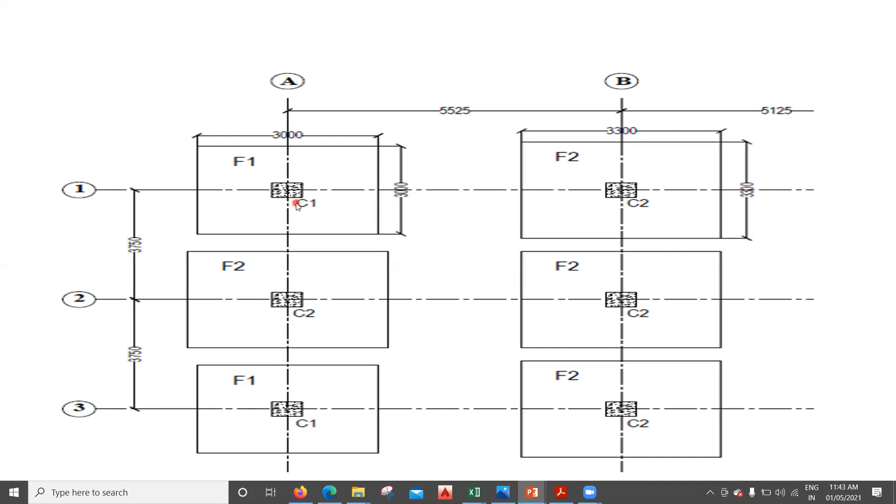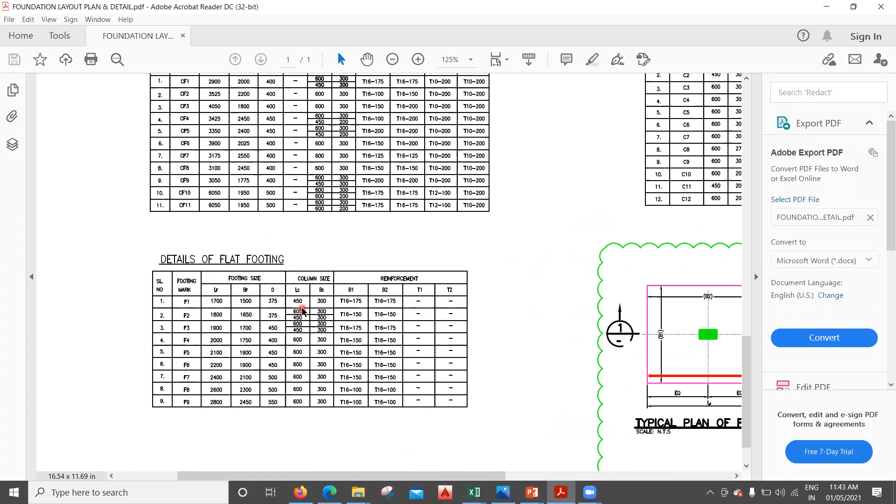Similarly, I'll show you here as well. So this is a drawing. Along with that, you can see the details given here. They're going to give the details. What is your footing name? What is the size of your footing? What is the length? What is the breadth? What is the depth? What column is coming on that? What is the reinforcement? Those things they are going to give in the drawing.

So here also I've taken the same thing. We have two footings, F1 and F2. The length of F1 footing is 3 meter, that is 3000 mm, by breadth is also 3000 mm, and the depth of the footing is 650 mm. Similarly, F2 footing is 3300 by 3300, and the depth is 750 mm.

And these are the reinforcement that you need to provide in the footing. Since these are RCC structures, in F1 footing you have to provide 12 diameter at 150 center to center spacing, and in the B direction, you have to provide 12 diameter at 150 center to center spacing. And here also you have to do the same thing, right?

If you're not able to understand how this has to be done, I have explained all these things in one of my courses on learn construction methodology. If you know it, well and good; anyhow I'll try to add one section here on how to understand the structural drawings. So as of now we'll concentrate on this part, right?

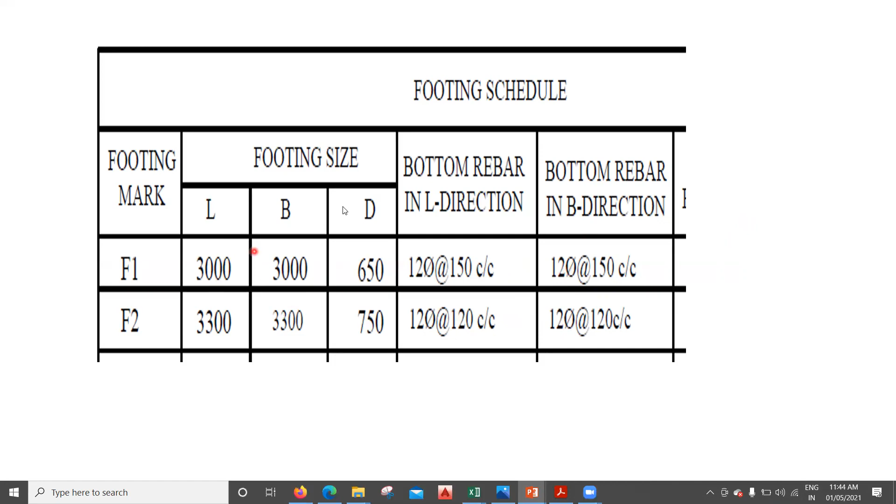So this much is understood to us. Now we'll try to prepare that sheet. I'll take you to that sheet now. So I've written everything here. You have to prepare an Excel sheet something like this. I'll be putting the same thing, you can try to prepare it. So coming to this item description, I've written unit, the number of members, length, width and depth, the quantity, and then the total quantity.

So what all footings we have? First we'll start with earthwork. Earthwork in the sense how much excavation has to be done if you want to do the concreting of this. So we have F1 and F2 footing, and then we have to do the PCC work, again F1 F2 footing, RCC work, shuttering work and reinforcement, right? So unit is in cubic meter.

Now coming to the number of members, how many F1 footings do we have? I'll take you to the drawing again. So if I take here F1 footing, we have one here. This is the second one, right? We have two F1 footings. So in the measurement sheet, I'll write number of members is 2 here.

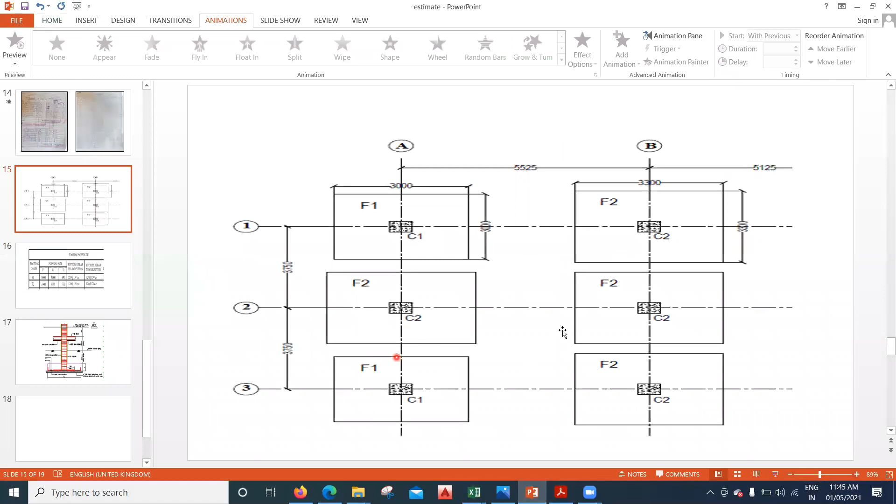Similarly, how many F2 footings are there now? 1, 2, 3, 4 F2 footings are there. So I'll input 4 here in F2 footing, right? This is also done. Now coming to the length. Now what we're trying to find is the excavation.

One thing we need to understand, whenever we do the excavation, this is how the excavation is done. So we are trying to find how much quantity of soil we are going to take out. Let us say my footing size is only this much. I'll draw it here. This is my footing size. But when we do the excavation, we have to take some extra offset to that. So that is called working space.

So whatever is the footing size, on both the sides you have to take some extra distance. I'll tell you how it has to be taken. So in this way, we have to take it. So what is this exactly? The first extra distance from here to here, this is a PCC offset. I'll write it here.

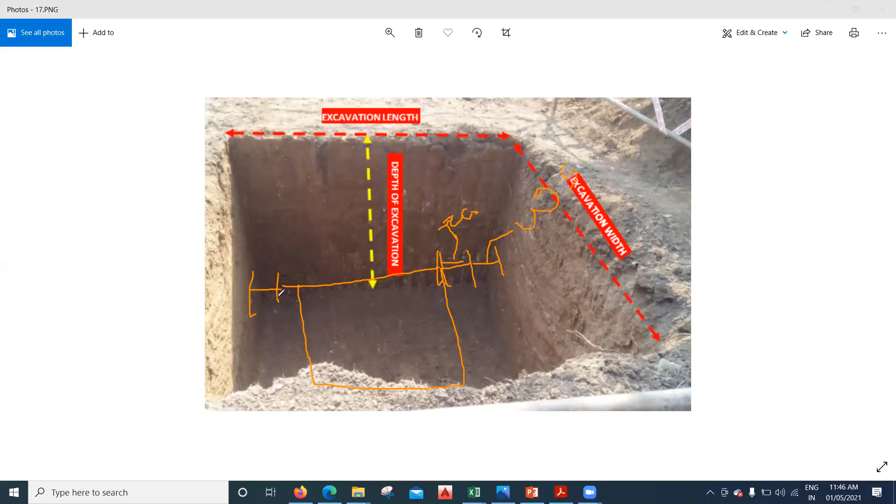This is a PCC offset. And next, this distance from here to here is a working space. I'll write working space as WS. Similarly, from here to here is a PCC offset, and from here to here, this extra will be your working space. Okay, so what is this working space?

If you don't give a working space, when the laborers get into this pit to do the shuttering work, they will not have enough space to work easily. So keeping that in mind, we do the excavation a bit more, so that it will be easy for the laborers to do the work here and also to keep the shuttering here, right?

And this working space, usually we can take it as 300 from both sides. Here also it is 300 and here also it is 300. I only explained along the length. On this side also you have to do the same thing, okay? You have to take the PCC offset and working space on all sides, along the length and along the breadth. Yeah, 300 is the working space we try to take.

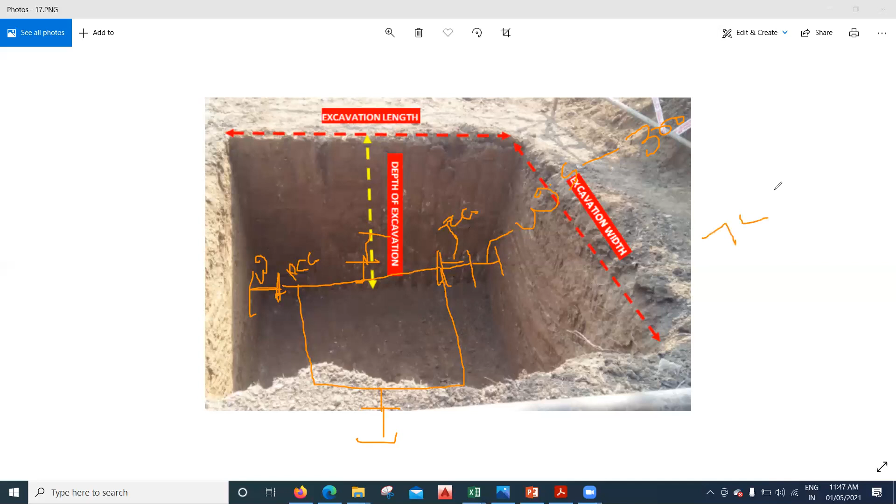So it will be equal to sign, 3 plus 0.3 for the left side offset plus 0.3 for the right side offset, plus the PCC offset of 75, so 0.075 on both sides, plus 0.075 plus 0.075. I'll hit the enter button. So this will be my length. Along the width also it is again 3 meter plus 0.3 plus 0.3 plus 0.075 plus 0.075, and hit enter. You have to use the equal to sign, only then Excel will work it out.

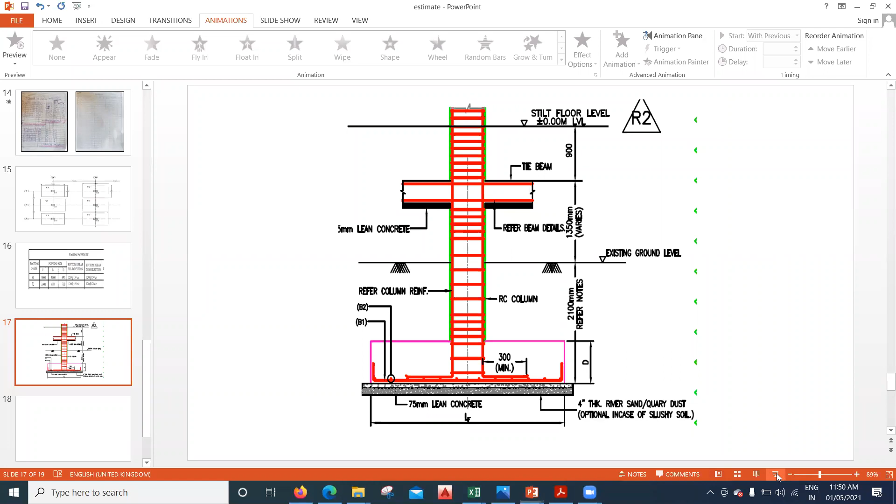Now coming to the depth. This is not the depth of footing, this is the depth of excavation. For the depth of excavation, look into this drawing. This is my existing ground level. From here I have to do the excavation of my footing. So what is this length? They have given 2100 from here to the top of this PCC, but we have to do the excavation till the bottom, right?

So it is 2.1 plus the PCC thickness of 75, plus there is something written: 4-inch thick river sand. So my total excavation will be 2.1 plus 0.075 for the PCC, plus the 4-inch sand bed, which comes out to 0.1, that is 100. If I add everything, I reach this bottom, and this is my excavation. 2.1 plus 0.075 plus 0.1 gives 2.275.

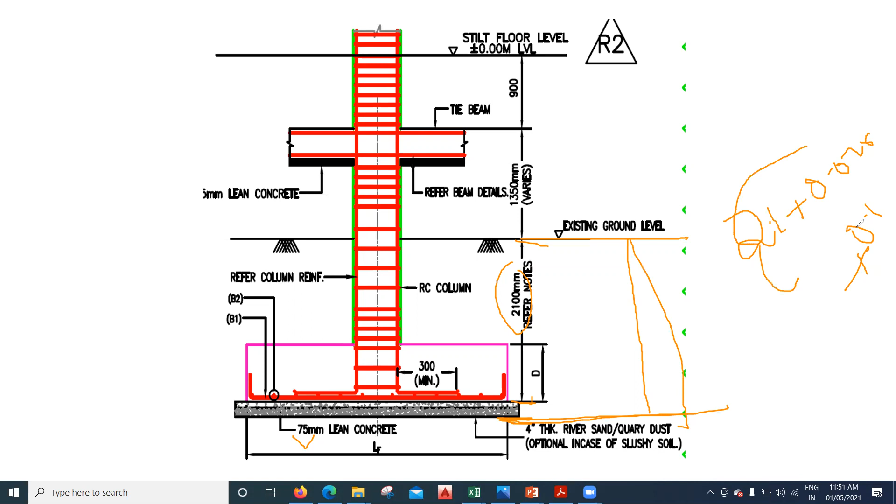So this is my excavation, right? That means this much excavation I need to do. The depth of excavation will be 2.275.

You can see everywhere the excavation has been done. So same thing I'll input here. So you can see 2.275, 2.275. Now coming to the quantity, it will be very simple: length, multiply that by width, multiply by depth, we'll get the quantity. Similarly, do this for here as well. Length and width is 4.05, depth is 2.275; length, width and depth, you'll get this.

Now coming to the total quantity, whatever calculation I've done in the quantity, that is for the single footing. When it comes to the total quantity, how many F1 footings I have? 2 I have, right? So 31.99 into 2 comes out to be 63. You have to click here. What you have to do is put the equal to sign, take this quantity, multiply this by the number. That's it.

Now coming to this also, it's the same thing. 37.31 is for a single F2 footing. How many F2 footings we have? We have 4 such footings. So multiply 37.315 into 4. Same thing I've done here. You'll get it. You can try to do it manually as well.

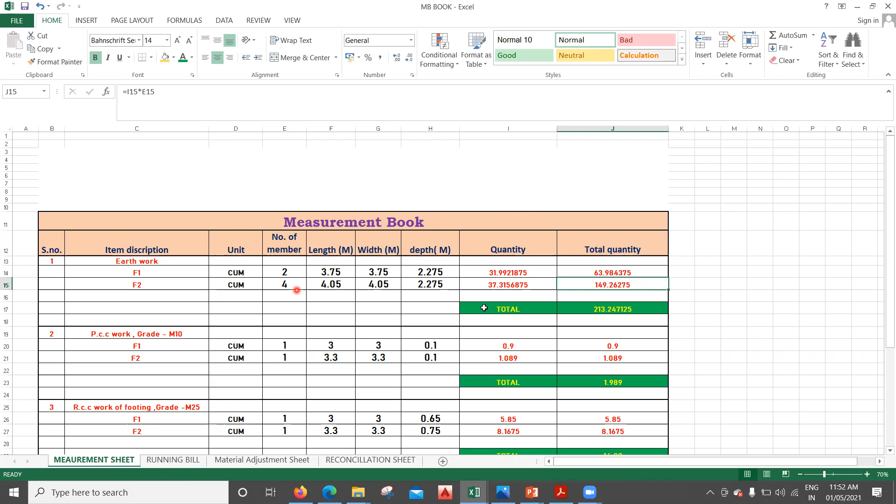Now the total excavation, how much we have done for this particular month. What I'm speaking of is only for this particular month; this much work I've carried out. So total will be 63 plus 149, which comes out to be 213 cubic meters of earthwork done in this particular month.

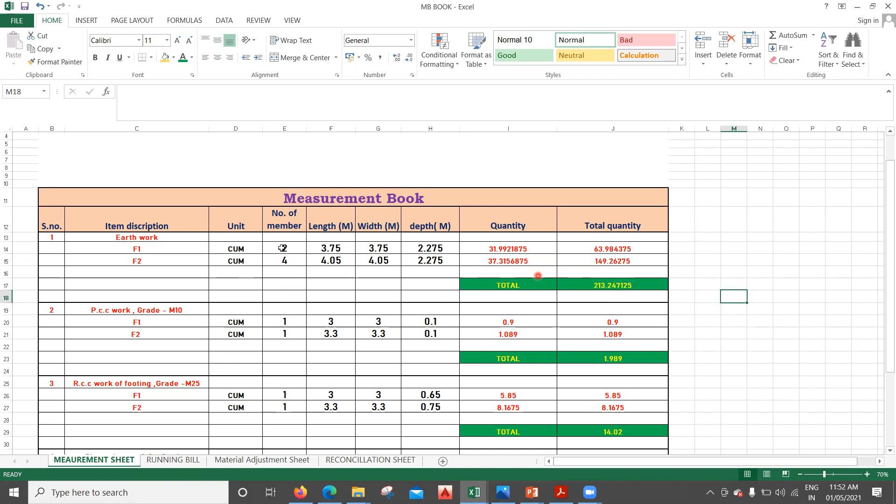Similarly, now go for PCC work. In the PCC work, again, F1 footing, how many we have? 2 footings. F2 we have 4 footings, right? So this time, what will be your length? Whatever is the size of your footing. This is my size of the footing, and for that I have to add PCC of 75 mm on the left side and 75 mm on the right side. Similarly, along the width also you have to do the same thing: 75 mm offset on this side and 75 mm offset on this side, right?

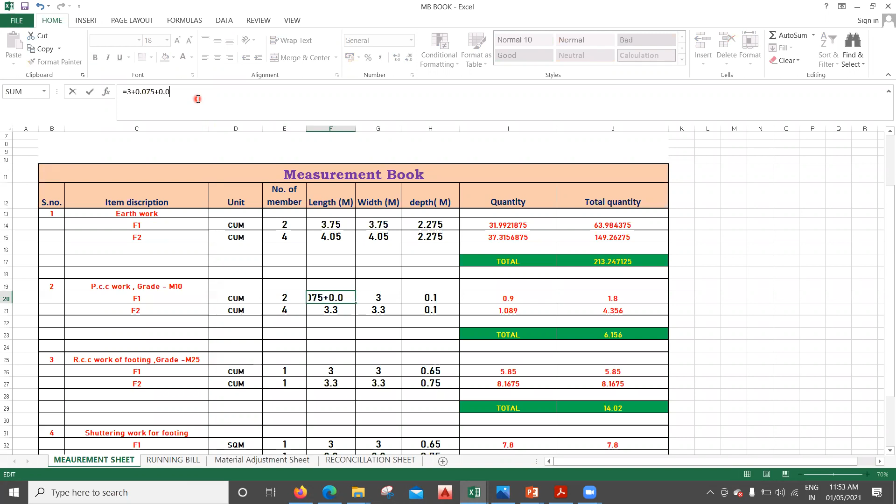So same thing I will do here. 3 meter is the size of my footing. I'll write it here: equal to 3 meter plus 0.075 plus 0.075. You can copy the same thing, or you can write 3.15 on both sides. And this is 3.3, so equal to 3.3 plus 0.075 on the left side plus 0.075 on the other side. Same thing, you can copy it here, 3.45.

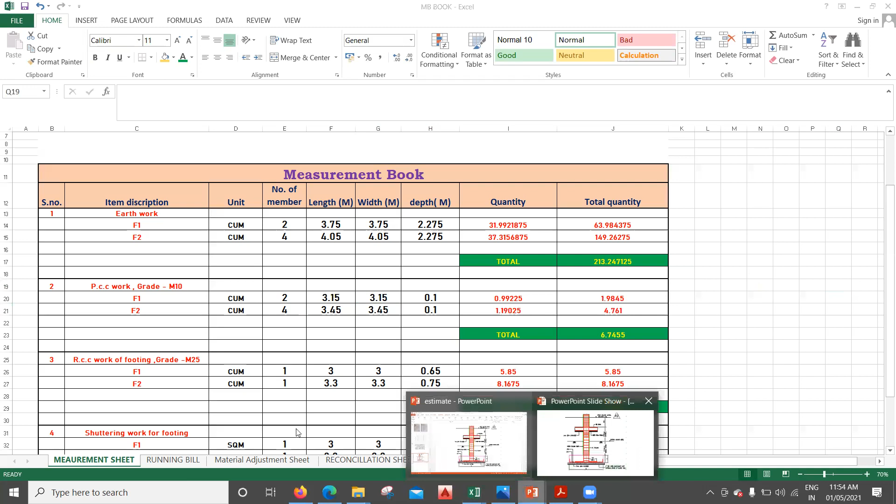Now coming to the thickness of the PCC, we'll consider the thickness of the PCC as 75 mm, because in the drawing it is mentioned. If you see here, what is the thickness given? 75 mm lean concrete. Lean concrete is also called PCC, right? So with this understanding, we'll go to the Excel sheet. 75 is in mm; I'll put it in meters, 0.075. That's it. The rest is the same as whatever explanation I have done.

Now coming to the RCC work on the footing. Here the concreting of that footing will be similar to the size of the footing. So the length is 3 meter, width is also 3 meter for F1 footing. For F2 footing, the length is 3.3, the width is 3.3. And coming to the depth, you can see in this drawing, right?

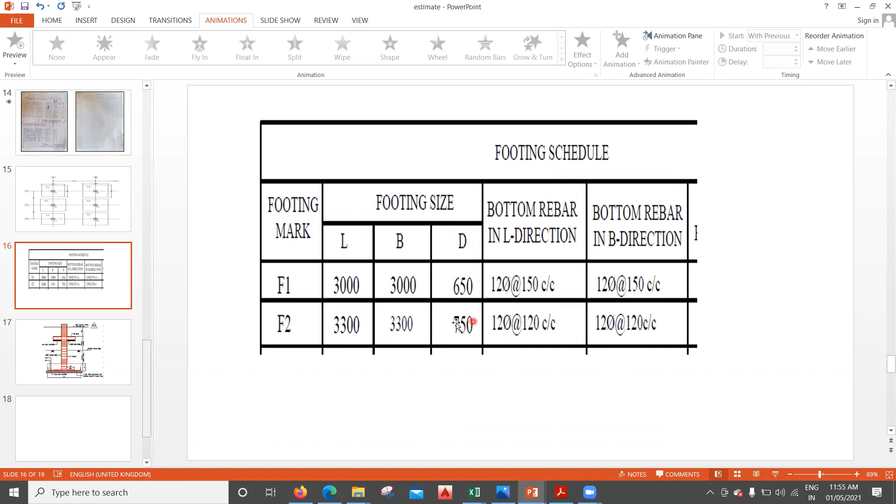See here, the depth of F1 footing is 650 mm, so 0.65. For F2 footing it is 750 mm, so 0.75. Same thing you can see here, 0.65, 0.75. Whatever is the size of the footing, that you have to write. The only thing is, the number of F1 footings is 2 and F2 footings is 4. That's it. The rest Excel will do on its own; I have given a link.

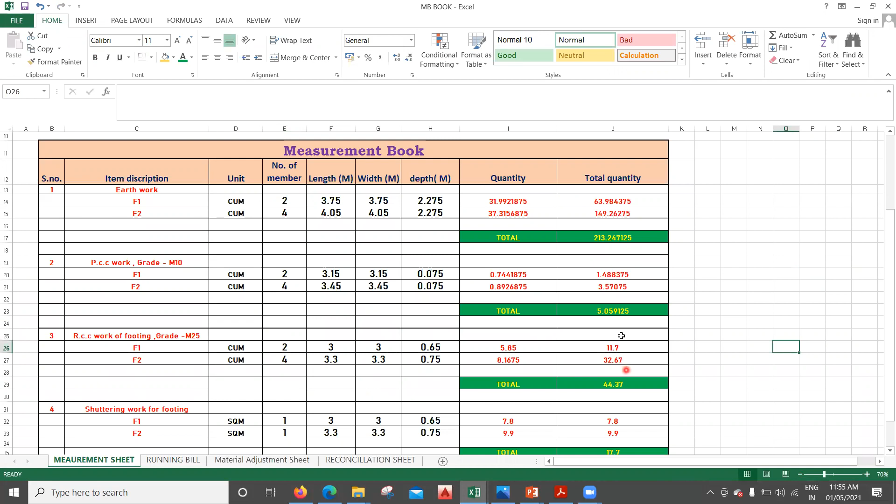And coming to the shuttering quantity. Shuttering quantity we will measure in square meters. Now, how do you find the shuttering quantity? There I have given a formula. If you want, I'll take you to one of that.

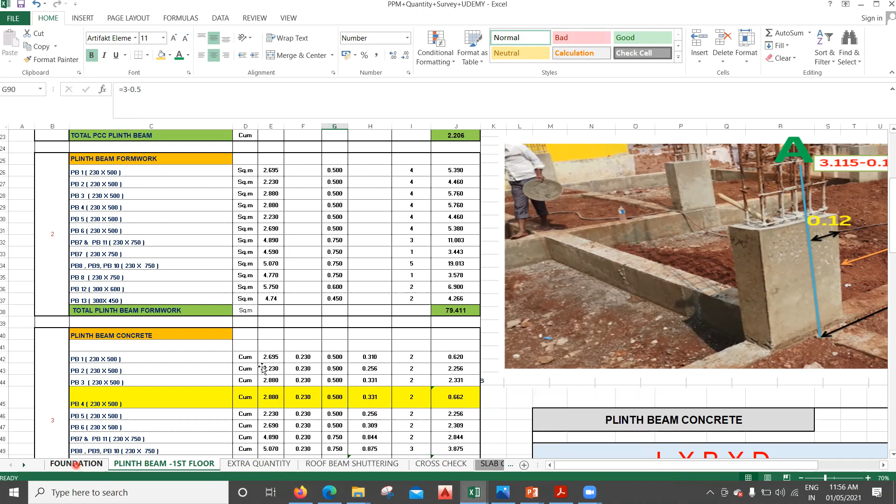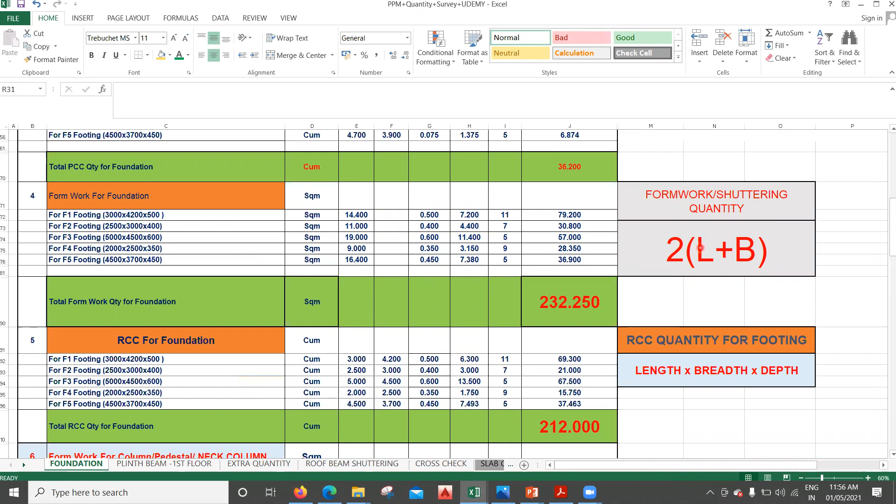Yeah, for the foundation, how to find the quantity of this thing: you can see here the formwork or the shuttering quantity. We have a formula: 2 times the length plus breadth. Whatever length you have plus breadth, you add it and multiply that by 2, you're going to get the shuttering quantity. So applying the same formula here, if I go back, see again, make these changes here.

2 footing we have, this will be 4 footing. Coming to the size 3.3, 0.75. Now here you don't have to make the change. Coming to the total quantity, here you apply that formula. So I already applied that formula. 2 into length, the length is 3 meter and the breadth is also 3 meter. You multiply that into 0.65, because see, I'll do it here.

2 times length plus breadth. Okay, I need to find the perimeter. Whenever you try to find the shuttering quantity, this is my footing size, I want to find the perimeter. So this length, this length, this length and this length I need to add. So I'll get perimeter. Perimeter you multiply by the depth of the footing, you'll get the area of the footing. Okay, so with this understanding, you do the same thing here. I'll do it anyhow.

See, 2 into length plus breadth. Length is 3 meter plus 3 meter. 3 plus 3 is 6. 6 into 2, 12. 12 into what is the depth of this? Depth is 0.65. Multiply 12 into 0.65. If I do, I'm getting 7.8. Same thing I'm getting in Excel. Similarly, I'll do it for this as well. Okay, I'll do it here.

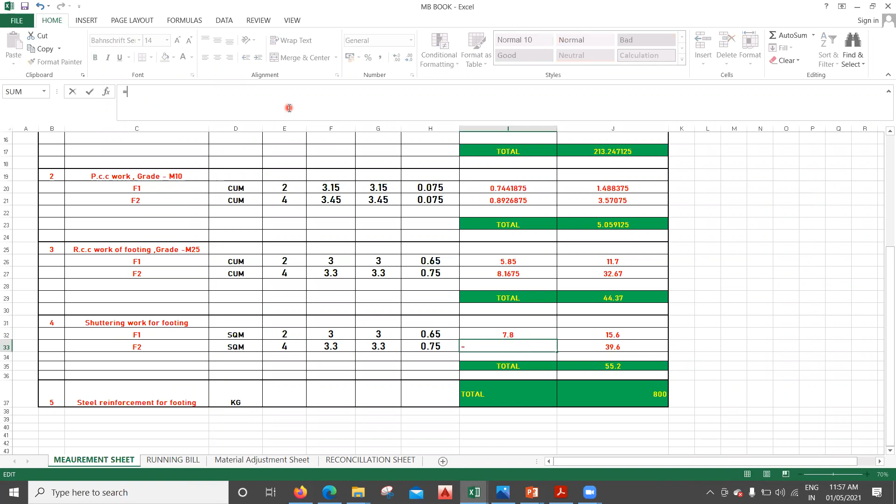Is equal to, what is the formula? 2, open the bracket, length. The length of my footing is 3.3, plus sign. Breadth of my footing is also 3.3. That's it. Close the bracket. 2 into length plus breadth formula is done. But I need to find the area. So perimeter is done. I have to multiply this by depth of the footing. The depth of the footing is 0.75. You multiply this by 0.75 and hit the enter button.

Yeah, you're getting 9.9. So if you want to do it manually, we'll do it. 3.3 plus 3.3 into 2. So multiply this by 0.75. Yeah, 9.9 I'm getting, same thing. Now this quantity we know, 7.8 is for single footing. We have two such footing. 7.8 into 2 you do, 9.9 into 4 you do, you get this total here, right?

Yeah, and the last is the steel quantity. For the steel you have to learn bar bending schedule. So that I cannot teach here. So for the steel, I'll show you how the bar bending has been done. This is how you have to prepare the bar bending schedule for the steel. For each footing you'll prepare how much steel is required. Once you prepare, this is for a different drawing I have done in one of my courses, finally you get how much quantity is required. You require 2830 kg of steel for this particular footing.

Now for our understanding, I'll take this only. We have taken only two footing, right? This month we have done only two footing here, F1 and F2. F1 footing we have 2 in numbers, and F2 footing we have 4 in numbers. How much steel is going to come, you have to do the calculation here. You have to prepare a BBS for that, and whatever amount you get from here, you have to input there. Now let us consider we are getting some 800 kg. We have taken some rough value.

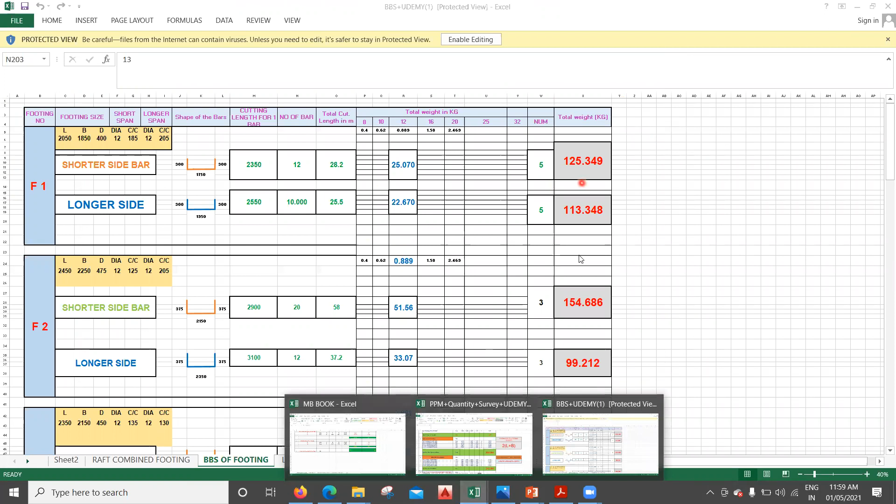Okay, you have to do it, but we don't have time to do all those things in this particular session. We are just concentrating on how to prepare the measurement sheet. Yeah, so I have taken 800. So this is how it has to be prepared. Then you will try to add everything, and finally let us say you got some 800 kg of steel. So I've written it here, 800 kg, right?

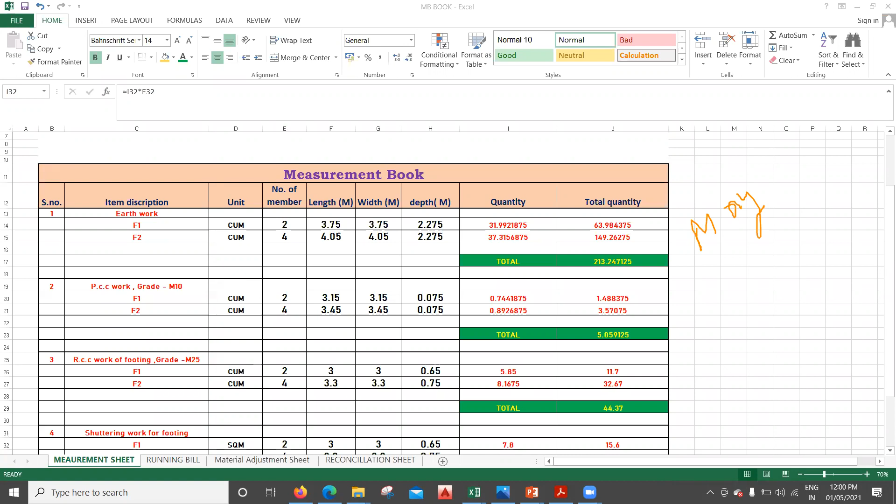So in this way, let us say this is my month of May. In the month of May, I have done this much work in my site. Earthwork this much, PCC this much, RCC, shuttering and all. And for this, I'll try to go for billing. So first I have found the quantity for everything. And in the next lecture, we'll try to see how to prepare the bill for this. Yeah, I hope these things are understood up to here.